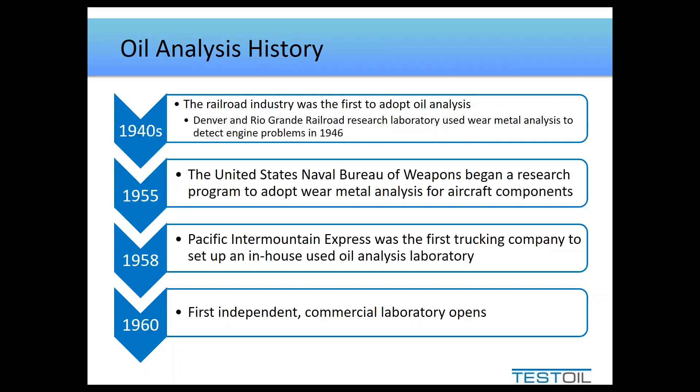Now, why I give you this little brief bit of history is to show you where it's coming from. Those first people in the 1940s and 50s, what they had going for them was they were working with very large fleets. They'd have hundreds of locomotives, hundreds of trucks, all owned by one company. They had a very limited variety of OEMs. So that means that if you bought one brand of locomotive, chances are you had 100 of them.

We also had very singular samples. We only took samples at drain. We didn't take samples while it was running. And we always took the sample from the draining oil, so the sample location was identical each and every time. The other thing that we had going for us was that each of these trains or trucks had fairly consistent operating conditions, meaning it was always going up and down the same places, always under the same or very similar conditions. And this would happen over the course of, say, many years, so we could smooth out some of those seasonal variances that we'd sometimes see.

But the last thing I'd like to point out is that because this was in its infancy, there were very few labs that were running, because some of the labs were in-house, and there was really only one commercial oil analysis lab for a while. And there weren't that many end users taking advantage of this technology. So there was a very strong and direct relationship between these people. Every success that was achieved with oil analysis was shared and known by all, and every deficit that was encountered was again shared and known by all. So the labs could tweak what they were doing, and the end users could tweak what they were doing, and everyone could work together and make this a very positive program.

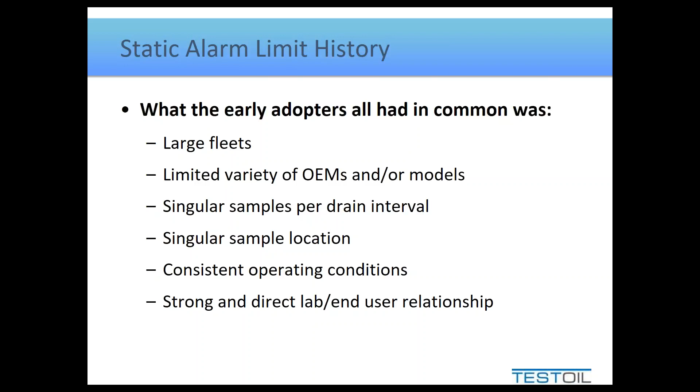So in today's world, we generally refer to it as big data, but given all the data that they had at the time, it was fairly simple for them to calculate these normal levels of wear metals and whatnot and figure out when and where to alarm them, because they would know that anytime that level had been exceeded was when they typically experienced some form of failure. But like I also mentioned, we could account for seasonal variations because we had tons of data to work with on a very consistent platform.

So this is what we had, and I point this out and I make sure I speak to it in past tense because this is the history, and history often dictates the future. And where we are today is actually vastly different than where we began, yet we hold on to some really old ideals. And one of those ideals is alarm limits, and that's the point of today's presentation, is to try and move you off that concept that alarm limits are the way to interpret oil analysis. Trending is going to be the far more important tool to use, and I'll show you why.

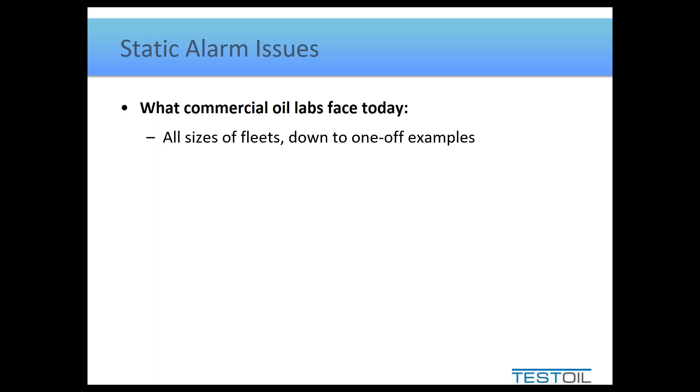So where we are today, to run through that same list, is nowadays we have all sizes of fleets. We have one-offs and we've got big fleets. But even though we might have a big fleet, we have a much greater variety of OEMs and models. So even if we can narrow it down to a common OEM, there's now perhaps options. You know, when we think about certain types of components, there's reservoir size options, there's turbocharging on engines, there's higher performance options that we can add on to hydraulics and whatnot.

There's lots of things that we do that start creating a greater variety, meaning you can't necessarily compare this one machine that looks like another machine because there might be some little difference between them that greatly affects what the oil analysis will look like. We also have started taking more samples. So we don't just take samples when we're draining the machine, we now take samples while we're running the machine. So we've got basically a moving target of what that oil is going to look like.

We also have introduced a variety of sample locations because not everyone's going to sample from the same point, since there may be multiple options for where to take a sample. Some people might take it out of a drain, some people might take it on a filter manifold, some people take it on a return line, and all these different sample locations may affect what the results look like.

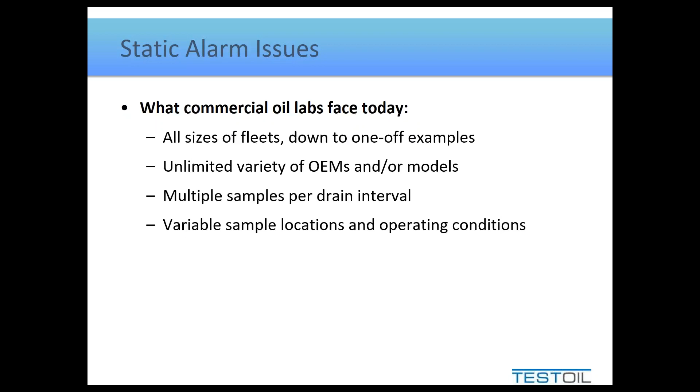But one of the key points now is that, oddly enough, we actually have a weaker relationship between the lab and the end user. Labs have grown substantially, and many labs have thousands of customers that they don't speak to on a weekly basis, and many end users treat the labs as a commercial service provider. They don't treat them as a partner in the reliability operations.

So they send samples to the lab, they get results back, and they work from those results. Whether or not they experience a failure, whether or not they avoid a failure, they don't share that information with the lab, generally speaking. So the lab doesn't know if they're doing a great job or if they're doing a poor job necessarily. They only know that their end user is satisfied with the service.

Now, one other thing I'd like to add to this list that wasn't on the previous list is that in today's world, the reality is this. Most commercial labs still receive many samples with vague information. So my example to you is something that's labeled Gearbox 101A, right? That is an end user name that gives the lab next to no details about the machine other than it's a gearbox. Oftentimes we don't get oil information, meaning we don't know what kind of oil is in there or how long it's been running or even how old the gearbox is. Sump volume's not provided, next to nothing's provided.

And the funny thing about this situation is we are still being asked, well, what's an acceptable level of iron? Or what's an acceptable level of silicon? And in today's presentation, I'm going to try and show you how you can figure that out, because this is the problem we're faced with, and I know many end users are also asking these questions. So I'd like to hopefully answer that question for both the end users and those of us working in the oil analysis industry.

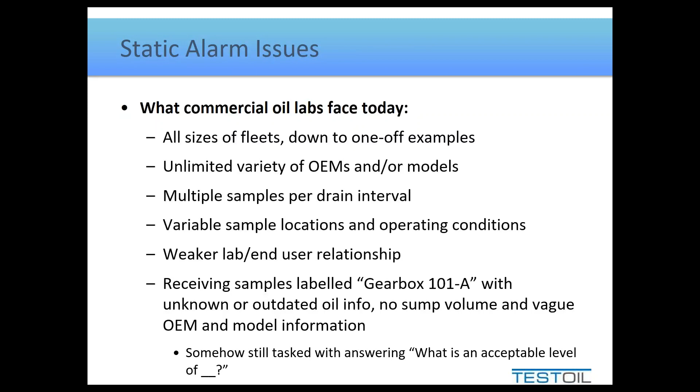So let's talk about sources of these limits. You know, we know they exist, we've seen them before, we've heard tell of them. They can come from a variety of sources. So the most common ones are directly from the OEMs, from your lubricant suppliers, and from industry. That's where you often see published tables with some limits being provided. Many end users, though, do rely on the commercial labs themselves to dictate what seems to be acceptable or what doesn't seem to be acceptable because they're relying on their experience.

What I'd rather see is end users coming up with their own limits, and that's generally based on some type of goal. Are they trying to extend their drain intervals? Are they trying to extend their mean time between rebuilds? Are they just looking to increase overall uptime and reliability?

Any one of these goals may dictate a certain type of limit or a certain interpretation of a broad set of data. Right? We can look at all the samples we've taken over the years, seen what works, seen what didn't work, and from there derive some numbers that might help us. But in the end, limits still have some inherent problems, and I'm going to show those to you as I give you examples of these various sources.

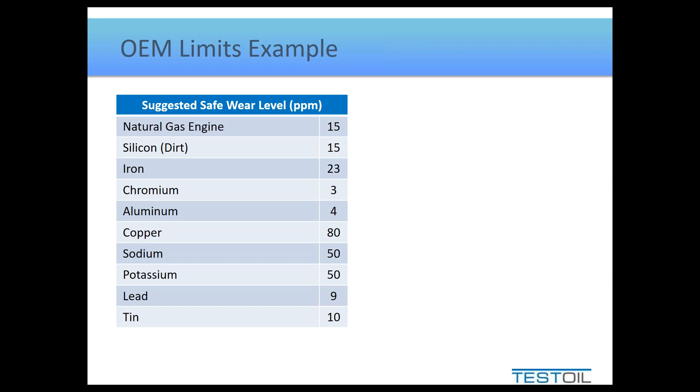Now the verbiage that comes along with this table, I'm going to show you now. And again, this is exactly as it was published. This is not my bolding. This is not my all caps usage. This is exactly how it's been published. So if you read the statement, it says these charts are for general use only. So right away, they're not meant to be used anywhere in particular. And then it carries on and says, and do not indicate definite limits of wear metals for any specific make or model. So in the opening statement, they're already trying to get out of you using these limits for anything in particular.

What it goes on to say, what I actually value, says wear patterns are best established after evaluation of 3 samples taken at, and here's the keywords, the same oil change intervals. I'm going to dwell on that point a little bit later. But then it finishes by saying make, model, application, age, makeup oil added, time of use, or recent repairs can cause the values to vary greatly from those shown.

So right away, they've given themselves the best cop-out possible by saying we haven't identified under which conditions this table works, and we're stating that any one of these variables, which are very common variables, will cause these numbers to be incorrect. So basically, they've said we've published useless data and no one should use it, and there is no good data out there. So why do OEMs publish these tables?

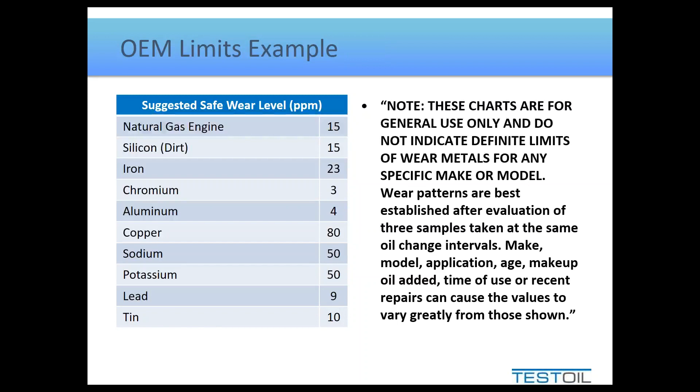Well, typically they use them to highlight major issues, things that have gone grossly away from normal operation and therefore need some immediate attention. Generally speaking, they're used to settle warranty claims. If you can show data that has remained within these limits, they might support your warranty claim. But if you show data that has exceeded these limits, that gives them a leg to stand on to back off and say, voids warranty.

As I point out, they don't claim to represent optimal performance. It might mean adequate performance. It might last through the warranty period, but it doesn't necessarily mean you're going to see a long life on the machine if you maintain those limits.

And the one last thing I'll point out, and this is a common denominator amongst most of the limits, is that they're generally implied to work on only those end of drain samples. You can't use the same limit on the running sample as you can on the end of drain sample because the end of drain sample has more time on it than the mid-interval sample. So we have basically samples taken across the entire length of an oil drain, which is a moving target, but we only have one limit to work from. And I'm going to point out how that's a bit of a problem.

But to carry on with giving you some examples of where these come from, let's take a look at another OEM limit. Now this one I will qualify where it comes from. It's from Parker Filtration, and it's a pretty common way of phrasing this. If you read it, it says water contamination of engine oils in concentrations as little as 500 parts per million can seriously affect the oil's filterability and the function of the oil's additive package. So in that opening sentence, they claim 500 ppm could be problematic.

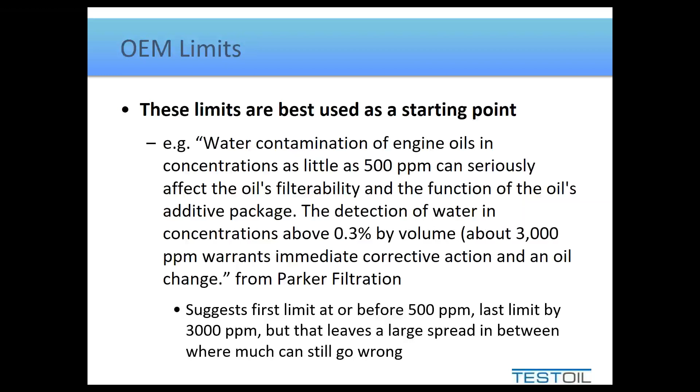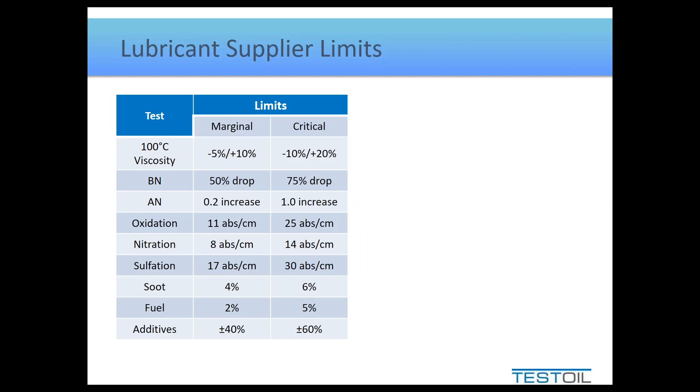So one of the other places we can look for limits is lubricant suppliers. And if you go to a lubricant supplier, and again, I'm not going to out them on this one, but this is a published online table of limits, and I've made no changes to it. This is exactly how it's been published. There are no typos in this one. But if you look at this, one of the first things I'm hoping that you notice is that they've provided limits for physical and chemical properties of the lubricant. They have not provided limits for wear or contamination like the OEMs did.

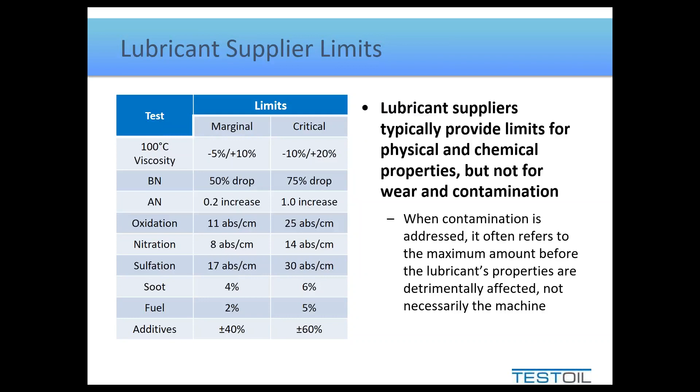So right away, we should hopefully notice that, because the OEM knows how the machine might wear. The lubricant supplier only knows the lubricant. They don't necessarily know what the metallurgy is in any one machine that they're going to possibly be using this oil in. So they can't really fairly address wear metals in their limits, but they can address contamination at times. But as you note, when they do address contamination, they're not talking about how much contamination the machine can tolerate. They're talking about how much contamination their lubricant can tolerate.

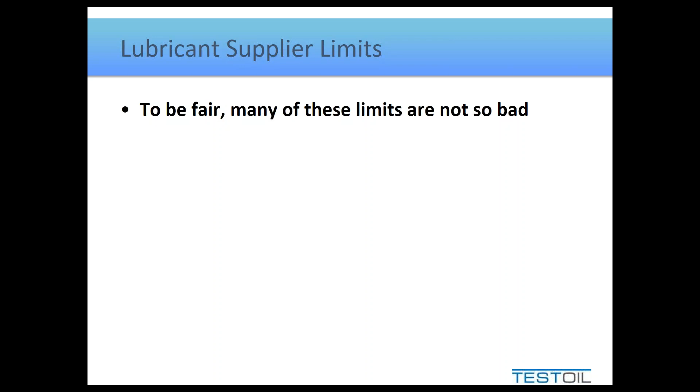So I'll take a step back here and say, I will be fair to them. Their limits aren't necessarily bad, not like the OEM ones. The OEM ones are horrible. But lubricant supplier ones, they have some credibility to them. I mean, when they talk about viscosity limits, well, it either is or it isn't in the correct grade. So that's fair to give a limit on that.

When they talk about something like a soot limit, well, there is a threshold for how much soot an oil will hold before it starts to affect its viscosity. Similarly for fuel, there's only so much fuel we can dilute an oil with before it will affect its viscosity. So I can appreciate having limits on those particular properties.

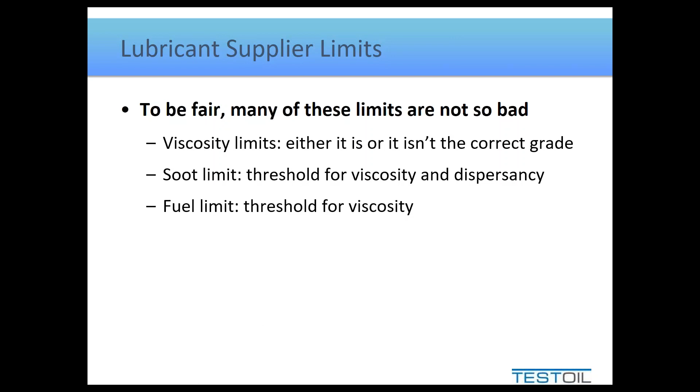Now, when it comes to additives, they may address additives at times, but they're not confirming that that additive level means the additives are functioning. They're just identifying their product. So if you send in a sample and then get some bad results or bad performance from the machine, and you go back to your lubricant supplier and show them the data and say, look, your lubricant's not working.

Well, one of the first things a lubricant supplier will want to check is if in fact you are using their lubricant. If there's any evidence of mixing with another product, well, they have, again, a leg to stand on to back off and say, well, we don't have to support you on this.

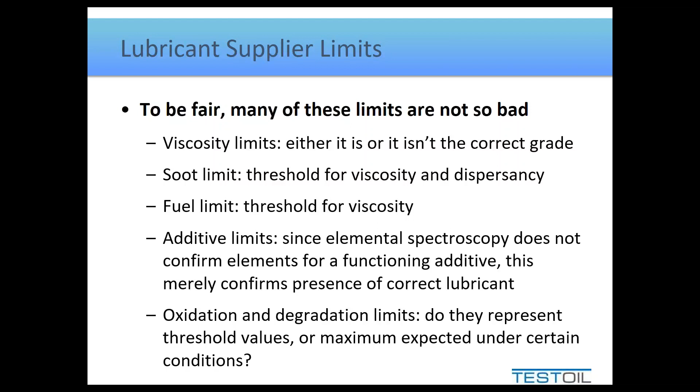Now, when limits are given for oxidation or other degradation properties, they are providing some sort of threshold there. They're saying that, yes, if you exceed this value or if you go below this value, it indicates the lubricant may not have optimal performance anymore. But you don't know under what conditions they come up with that number. And sometimes you might run under conditions that would suggest that's too early for an oil change, or you might run under conditions where it suggests that may be a little late for an oil change. So again, you always have to take these limits as a starting point, whether they're from the OEM or whether they're from the lubricant supplier.

Now, going to a different source, there's industry-specific limits, and this is one of the most widely cited tables in the industry. It's from ASTM. It's ASTM D6224 if you want to know where to get a copy of this one. But I've published it in its entirety here, and it's a pretty decent table. It covers a wide variety of tests, and it is sorted according to machine types. So we've got some pretty decent data here.

But as much as people have used this table, very few people really read the full title of the ASTM standard. It's down there in the footnote, and I'll read it out to you. It says, Standard Practice for In-Service Monitoring of Lubricating Oil. So that part sounds pretty good. But it finishes off by saying, for auxiliary power plant equipment. So it's a very niche industry that has created this table, and it's been widely applied to a lot of other industries where these may not be the most ideal numbers to go by.

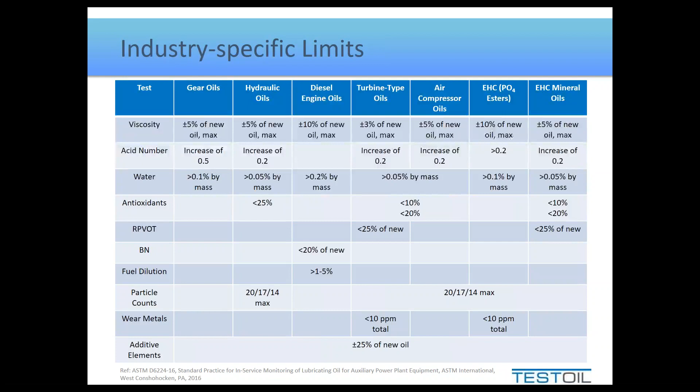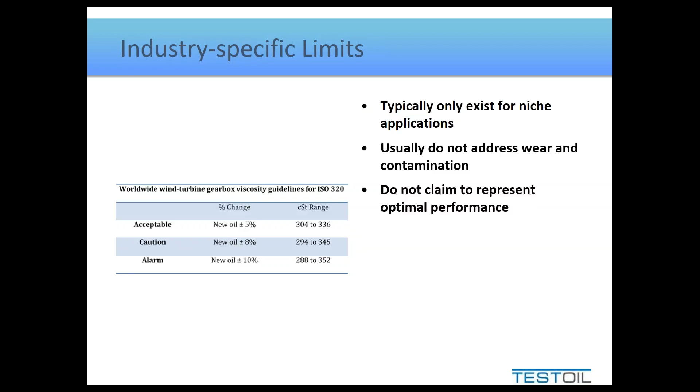To give you another quick example would be this one. At least within its title, you know the niche that it fits into. It says Worldwide Wind Turbine Gearbox Viscosity Guidelines using an ISO 320 oil. Very clear exactly where this applies to, but doesn't address wear, doesn't address contamination, doesn't claim to represent optimal performance, just gives you cautions and alarms.

Again, this is only implied to work on end of drain samples, not necessarily in-service samples. If you happen to achieve these values within the normal service interval, then you probably just change your oil. But if you achieve them earlier than that, say even on the first sample, there's nothing that's going to elevate that alarm to say to you, gee, that's really unusual that you've crossed this threshold already. So this kind of highlights some of the major problems we have with all these sources.

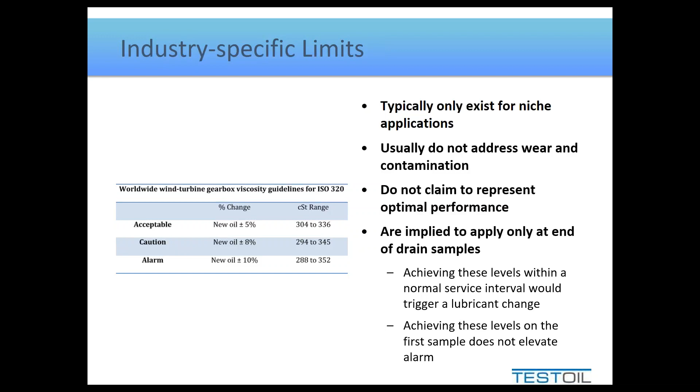But like I said, a lot of end users, they don't go to these, they go to the lab. Now the lab has two different ways of coming up with their limits. One is static limits, which is sort of the crux of the presentation here. And another one is what we call rate of change limits, which is sort of used by some labs. And again, I'm going to pick it apart. So there's no point getting too happy about this yet.

Now, when we use static limits, one of the reasons labs love static limits is because they can plug them into a computer and a computer can alarm all the sample results. So it makes for a fast and easy process for the lab to follow, and it's easy to explain when somebody phones up about a particular report and says, well, why was this alarmed? You can say, well, it's above the limit. Easy peasy. Again, these tend to work best on those end of drain samples and don't work well on all the in-between samples, the mid-interval samples along the way.

Now, one of the ways you can try and make these better than just some arbitrary limits that have been determined is you can try and statistically derive them. And you can look at a lot of historical data and you can come up with some reasonable numbers, but you have to only use the end of drain samples, because if you add in the mid-interval samples, it's going to start screwing up the math. And I'll show you an example of that in a few more slides.

What gets cool about doing statistical derivation is you can make it specific to a make, a model, an oil type, or a make, model, oil type combination. They get better and better that way. Now, with this concept, at least, there are still some issues. So let me show you a few of the issues.

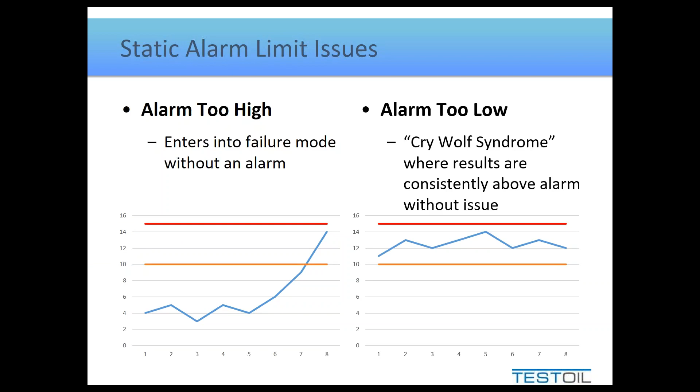The other issue we often see, though, is when an alarm is set too low and something is constantly an alarm. And we call this the cry wolf syndrome because, of course, we begin to ignore it because you're like, it's always an alarm and there's never a problem. So these are two of the common issues that we can get, but there are more than that.

And one of the main things that leads to some of the other problems that I'm going to show you is that when we statistically derive limits, we are basing them on a multitude of assumptions, a multitude of variables that we are going to assume are fixed. And there was a great article that was written, and I'm going to show you a quote from, that established some pretty decent limits. Now, it published it in 3 different tables. So there was limits for wear, there was limits for contaminants, and there was limits for additives.

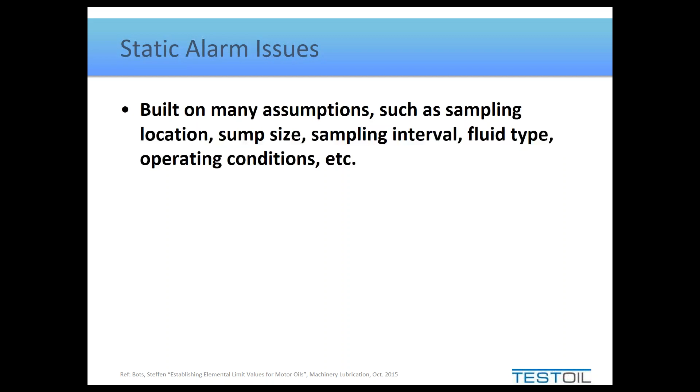And I'm not going to show you those 3 tables because they're useless. They have no value to you within this presentation to see them. What I want to show you, though, is the quote that was published after the 3 tables. So this is directly from the author within the article. He says, the warning and limit levels listed in tables 1 through 3 for wear elements, contaminants, and additives are based on, and now he goes in to qualify all the conditions.

So he says, semi-synthetic motor oil, 10W-40, in a modern diesel engine with an oil volume of approximately 25 to 50 liters, using a certain type of fuel with an oil service of approximately 500 operating hours or a mileage of 47,000 miles. So he has qualified to the nth degree everything that determined where his tables came from. So if you don't happen to be using semi-synthetic, don't happen to be using a 10W-40, happen to have a different sump size, use a different fuel type, or have a different operating life, these tables are useless to you.

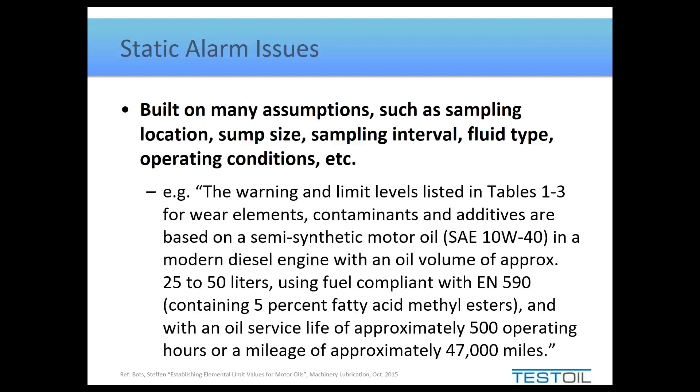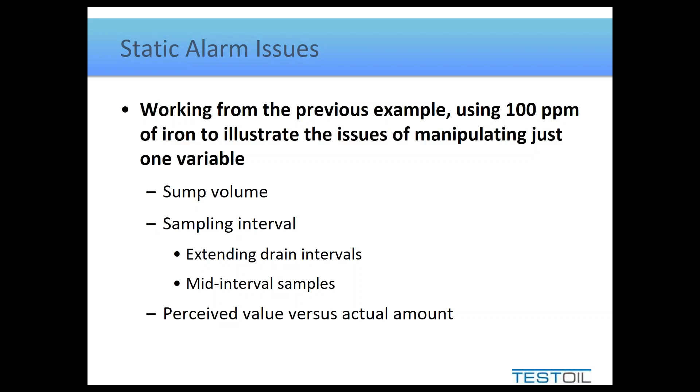So when we look at his table, I decided to pull just one piece of data from it. He stipulated that 100 parts per million iron was the threshold limit for wear. So using the 100 ppm iron from his derivation, I'm going to show you why he qualified all those statements. So I'm going to give you an example where sump volume plays into it, sampling interval plays into it, and I'm going to give you one other example in terms of how people misinterpret some data. But again, I'm basing this off of 100 ppm iron in that particular application.

So when you start to consider sump volume and you think, okay, I have, as an example, a gearbox, and you go, one gearbox is the same as the next gearbox is the same as the next gearbox, and you go, well, they may all do the same thing, they may all be built the same way, they may be all the same manufacturer but different models, they may all use the same oil, but if they have different sump volumes, that's going to affect the results, and that will affect where the alarms will be set.

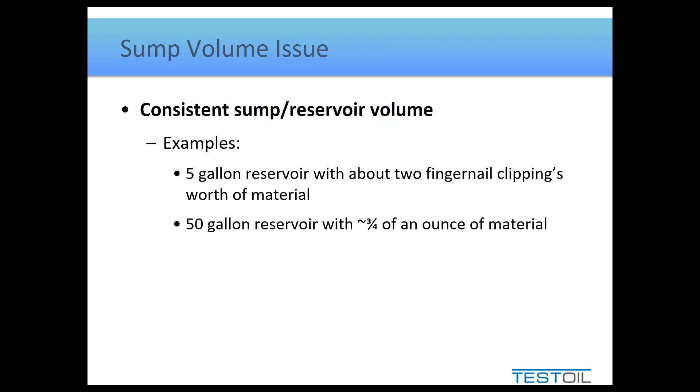So for consideration, I give you a 5-gallon reservoir that's got about 2 fingernail clippings worth of iron in it, a 50-gallon reservoir that's got nearly 3/4 of an ounce of iron in it, and a 500-gallon reservoir with a 1/2 pound of iron floating around in the oil. All three of these will measure out to 100 parts per million of iron.

Now, if you had a 5-gallon reservoir on your gearbox and you had about two fingernail clippings worth of iron in it, you wouldn't think that was much of a problem. That would be considered perhaps normal wear or the very early beginning of wear. If you had a 50-gallon reservoir with 3/4 of an ounce of material in there, that would start to look like something major. But if you had a 500-gallon reservoir and there was half a pound of iron in there, you'd be looking for a broken gear tooth. Right? Completely different perspective on it.

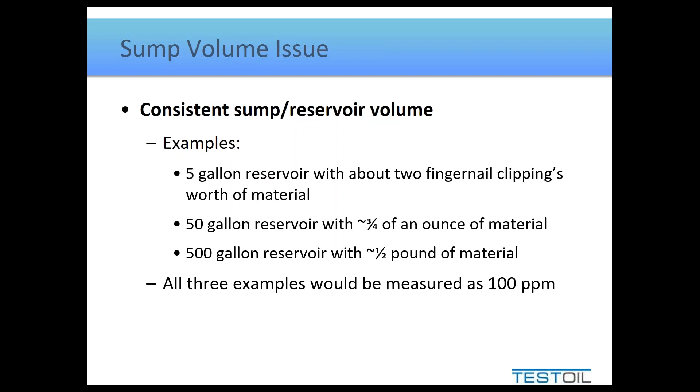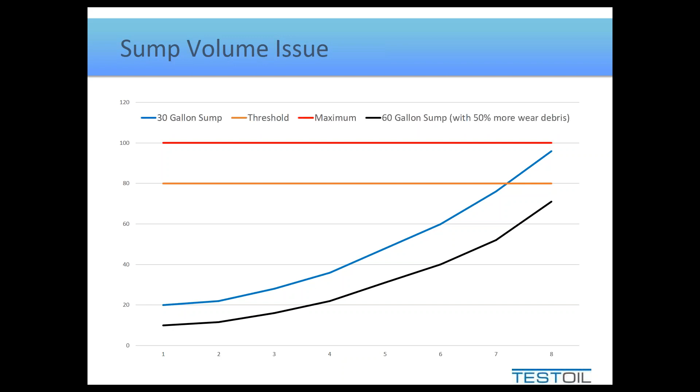And if we try and apply that same alarm limit, the black line is depicting that that alarm will not come off anywhere soon. It will take an extra few samples before we achieve that 100 ppm alarm limit. And at that point, we've experienced, like I said, 50% more wear. So sump volume plays a critical role in where you set these limits, and you can't apply the same limit on different sump volumes.

Now, getting to the drain interval issue, if we assume, like I said, I'm just pulling from that article, a 500-hour drain interval and that iron limit of 100 ppm. Well, what happens if you try and extend your drain interval? If you extend your drain interval from 500 to 750 hours, that's a 50% extension on your drain interval. So you would expect 50% more wear, 50% more contamination, and 50% more degradation would be par for the course.

But if you only achieved 110 ppm in that 750 hours, you'd still trigger the alarm because the alarm was set at 100. Right? So that's a bit of a cry wolf situation. You set the alarm too low. But 150 ppm is what would be or should be considered normal.

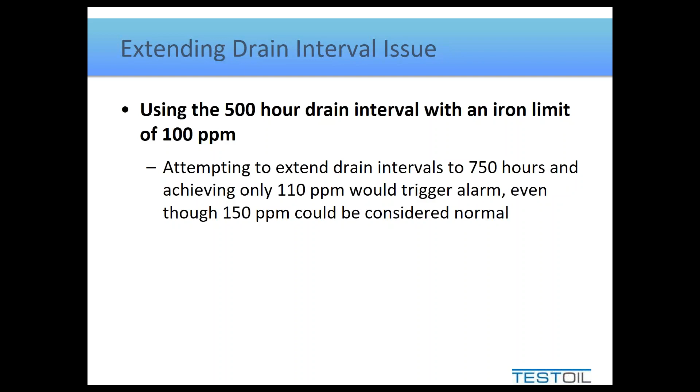So when you start making any change to any variable, having that one static limit is only going to lead you to problems. And what I usually call this one is the eventuality problem, because if you leave oil in service long enough, eventually it's going to cross any threshold you have set. Right? Eventually it will build up enough wear material or enough contamination in it, or it will degrade far enough to cross a threshold. But the issue is, in the time that it took to get there, that may not have been a problem. So we're highlighting things that aren't truly problems. We're maybe identifying when to change the oil, but we're not identifying when the machine is actually suffering.

The other issue that we have is that when we set these alarm limits, we tend to miss the overall trend. Right? When we watch an oil sample go into alarm, we take a corrective action and it falls back out of alarm. Then eventually it goes back into alarm, and we take corrective action and it falls back out of alarm, and we keep repeating this.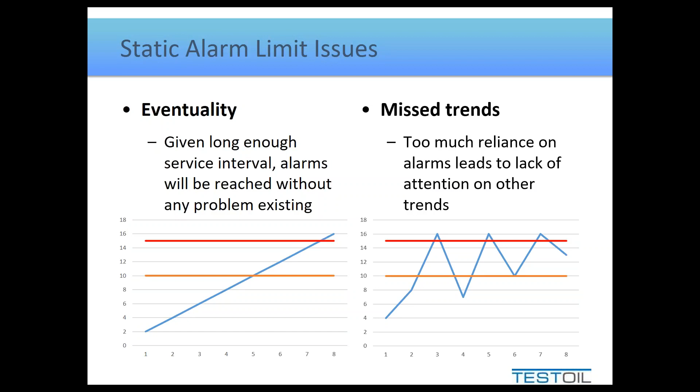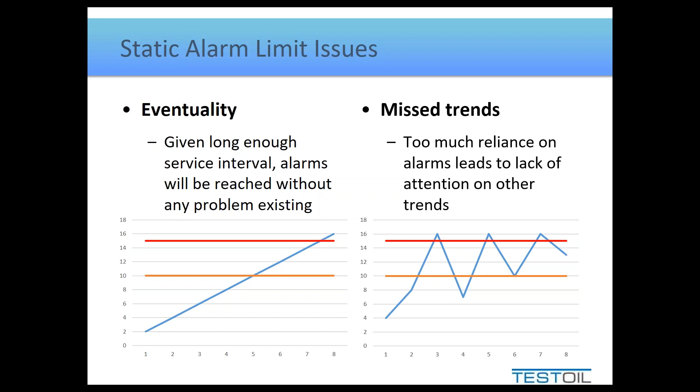So one of the issues I've been highlighting along the way is that most of these limits are always implied to work on end of drain samples. And I said to you at the beginning that you can only statistically derive limits if you use the end of drain samples, that you should not use the mid-interval samples. If you include those mid-interval samples, you're going to drive your data to half of a reasonable limit.

So consider again the data from that magazine article. It was suggesting 100 ppm was the limit. So let's say he got that from one data point only, from an end of drain sample point only. Well, if he gets one data point at 100, the average for that data works out to be 100. But if he has two data points, the second data point would be the mid-interval sample. So at mid-interval, you would expect a mid-result.

So say they were 50 and 100. Well, your average drops down to 75 now. If you had three data points along the way, so two mid-interval samples and your end of drain sample, and again, just smoothing the data out here to be very linear, your data points would be at 33, 66, and 100 ppm. Well, the average for those three values works out to 66 ppm. So you see how my average is dropping just by including more data in between a normal 100 ppm end of drain sample and just adding more mid-interval samples along the way.

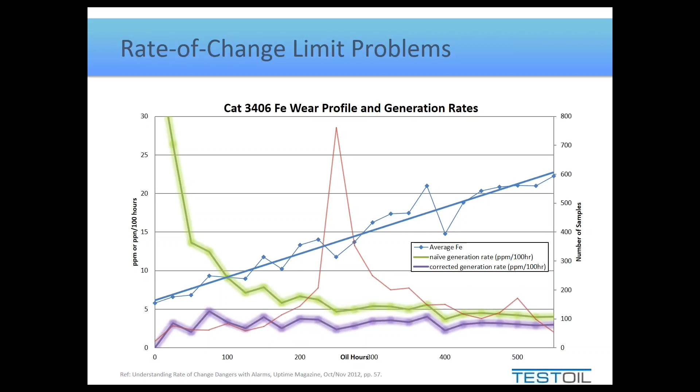So right away, we can take a look at those two assumptions we began with and say, the rate of change doesn't increase, and we've already identified values don't reset to new oil values at an oil drain. So rate of change has too many issues. So the only issue we have is to come up with something that works. Well, the something that works is trending, and that's the end of the presentation here, is to talk about trending.

So trending is a very simple way of interpreting data, and you can use the simplest of tools. Linear regression is one of the simplest ways of looking at a trend. Now, to do this, we need a bit of a history. So as few as 3 samples can give us enough of a history to start doing something with this. And at TestOil, we wait for that 4th sample. That's how we do it. Sample something 4 times in a row, we can turn on linear regression, and we can now look at a predictive path of where that data is going.

So all we need to do then is look for a significant deviation from this projected trend based on the previous 4 pieces of data, using a linear best fit, and say, if it's outside this value, set off the alarm. Now, the typical ways that this can be done is simply by using standard deviation. So I won't get into all the complicated math behind that, but it's pretty simple statistics that 1 standard deviation includes the bulk of the data, 2 standard deviations starts to indicate some of the outliers, and 3 standard deviations where the greatest concern is placed.

So generally speaking, when you start setting alarm limits, you consider 1 standard deviation to be okay, but anything that exceeds 2 is kind of a caution, a marginal, and anything that exceeds 3 is definitely warranted to be critical. The nice thing about linear regression is it can work in harmony with any established limits. So even if you've been given limits from your OEM, your lube supplier, or industry, or if you statistically derived your own, whatever the source may be, you can still use them in conjunction with trending.

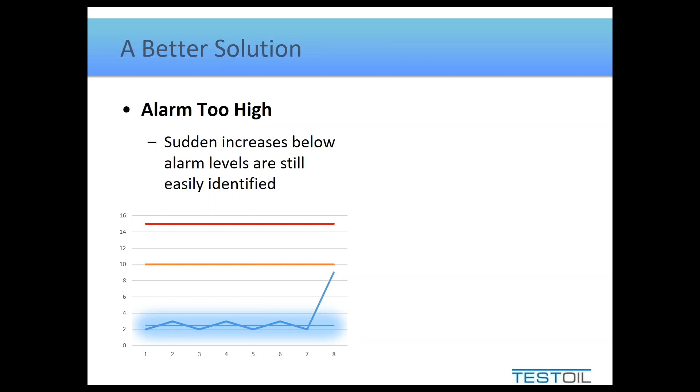In the case of the eventuality, as long as it follows a fairly predictive path, no alarms get set off because it says, no, that is expected, that is normal. For continued service, you're going to get continually higher wear, higher contamination, and more degradation.

The trends one, when we missed out on an overall trend, this one, again, can capture it because it can show it to you, because you can see the best fit line is actually rather steep. Even though the data looked like it was fairly horizontal, we can pick out what that trend might look like, but we're rewarding that trend and saying, no, it's following a definitive path.

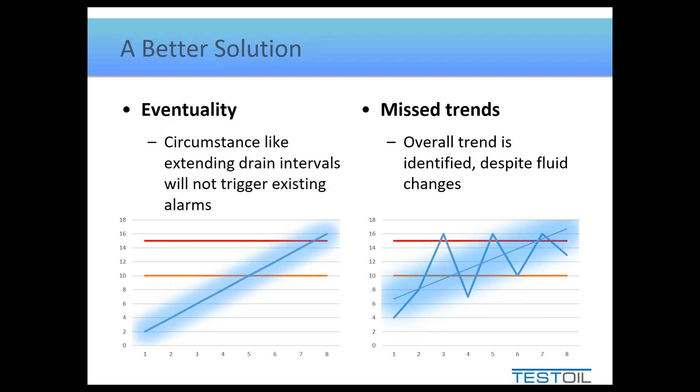The point is, this is a huge point. It's not that 7 means it's going to fail. It just means it's outside of trend. Because if it's 7 now, where do you think the next data point is going to be? It's going to be way higher on sample number 9. So we're actually being predictive at this point. It's not to say that 7's a problem. It's saying 7's indicating there will be a problem. That's the big point here.

But normally when humans see a value like that, they would say, well, I wouldn't alarm that. Turn that alarm off. That's 7 ppm. That's not worth alarming. But it is. It is because of the trend that preceded it, not because of its absolute value.